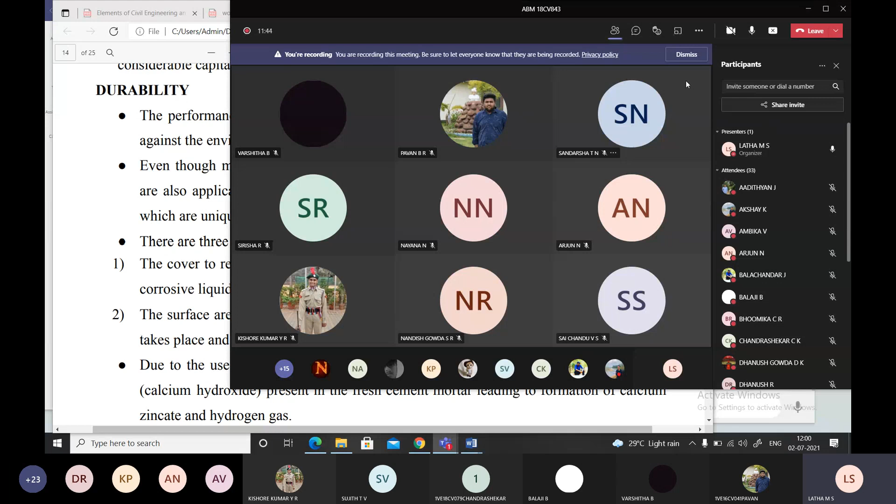That should not happen. You should apply your mind. How to answer a question is very, very important. Fine, I think you know what I'm talking about and you know what you have done. Correct?

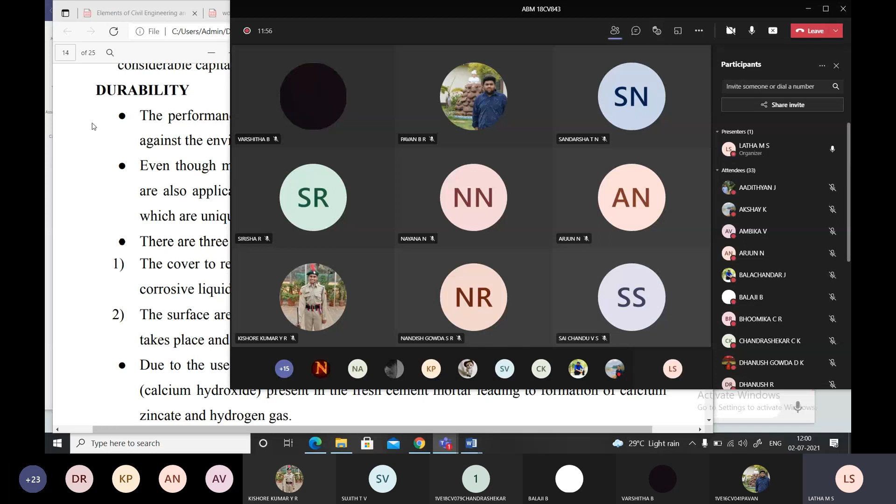Irrespective of the question asked, you just blindly wrote. The last question was asked: why do you prefer ferrocement instead of RCC for limited applications?

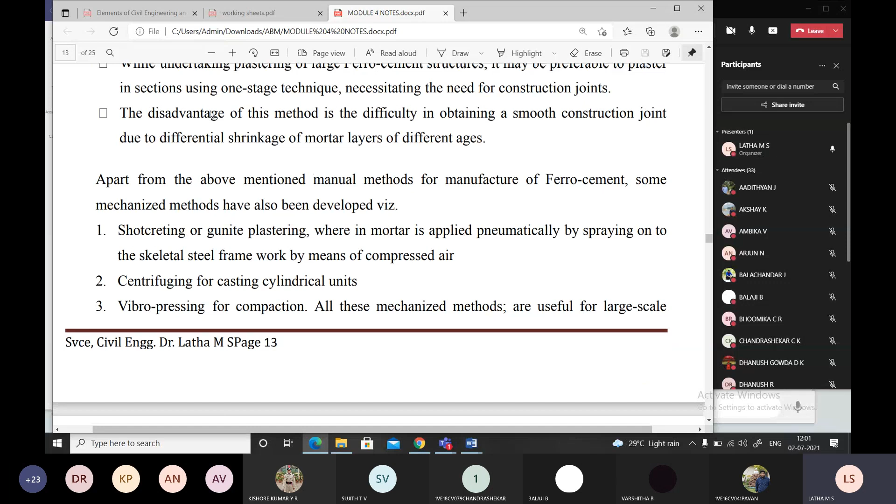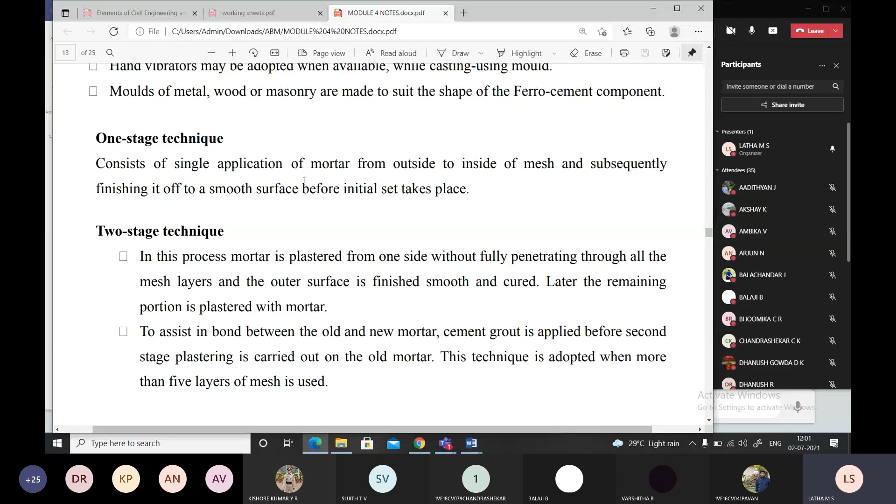Correct, a section unit. What is the complication? There's no complication in ferrocement. It can easily be approved or implemented with high technology just by improving the gauge. Correct, improving the gauge and all that, not like ordinary cement. Right, students? That should have been your answer.

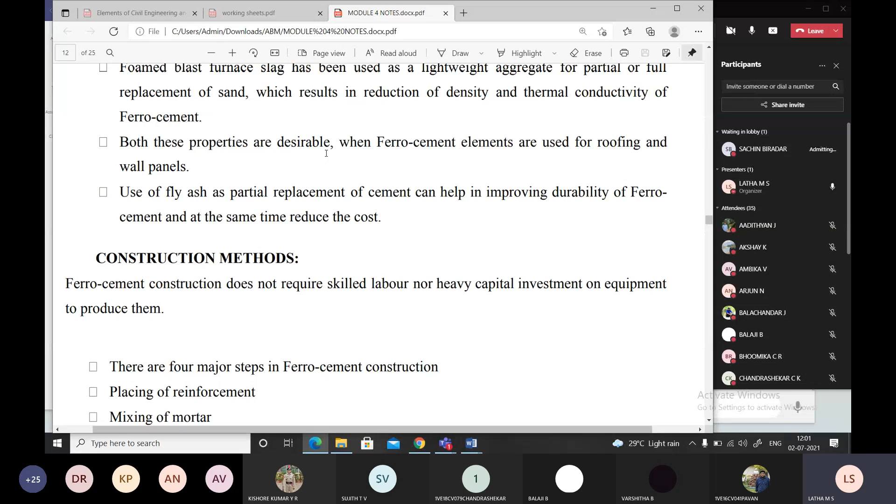Students, okay, but the answers you have given were not satisfactory. You have not read through the notes and you have not heard through my lecture. Most of you were not alert throughout the class while I was explaining and discussing the topic. You could have written a well-defined answer, and I was expecting very good answers from a few, because those questions

were at a higher degree, not a direct question. It was asked with respect to LEED and IGBC, correct? There were questions like LEED and IGBC, correct, my students? How do you answer such questions?

And some students, I'll tell you, uploaded the assignment as an answer script. Assignment as an answer script, students. How is it possible, students? Tell me. How is it possible to do so? Huh? They uploaded some assignment 2 or something like that for

the test answer script. Is that correct, what you are doing? That is very much wrong.

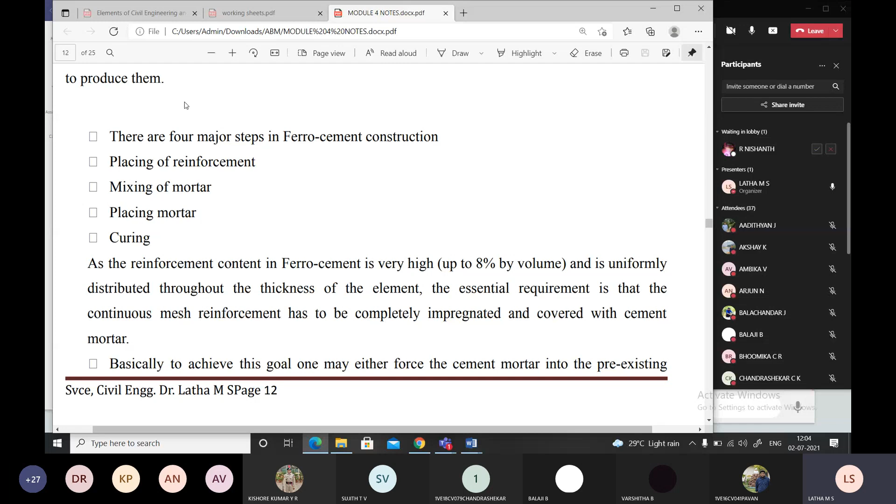Isn't it, students? Your answers were not unique and not descriptive. Correct? You never spoke in terms of IGBC and LEED, so there you may lose some marks. Okay? Never mind, make one more attempt. You have 3 internals to appear.

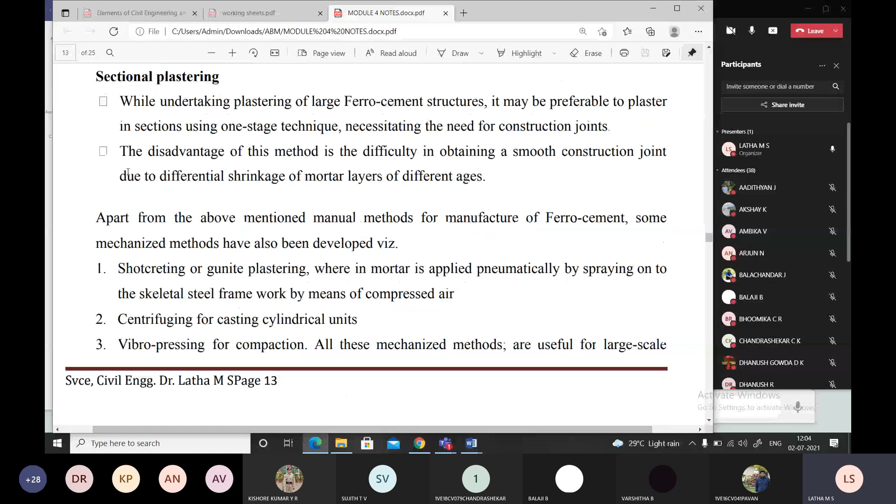Right? Next we'll continue with ferrocement as a durability aspect. We'll talk about ferrocement. What is durability, students? How do you define durability?

38 students are there in the class. How do you define durability? Life expectation of a material. Yes, it's an expectation, life or expectation of a material. Correct, or otherwise any other, that is also good.

Correct answer. Then the performance, the property of a material... the property of a material to withstand harsh climatic conditions and wear and tear. Yes, very good. See, one thing I would like to clarify, students: a ferrocement structure, it cannot be a material, right?

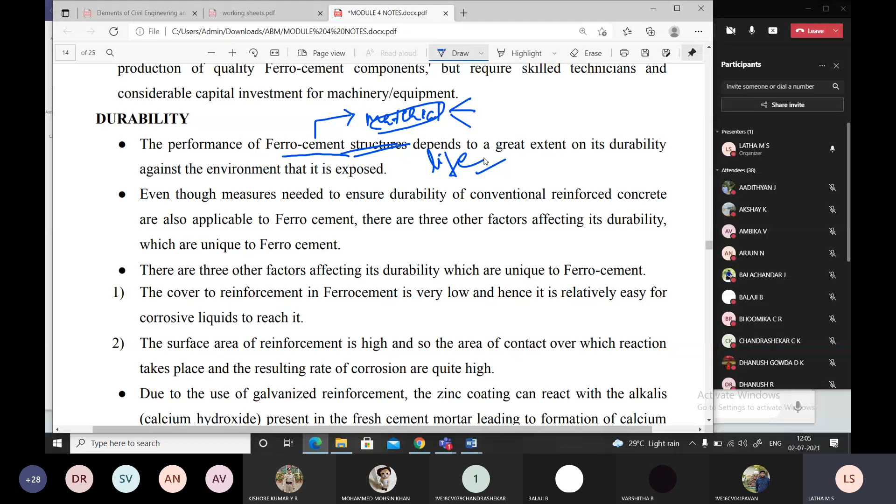So it is an element, correct? What are the materials composing ferrocement? They are cement, sand, and water, correct? So composing all the material, it forms into a structure, a ferrocement structure, or a ferrocement element. So this ferrocement structure depends to a great extent on its durability against the environment, right?

You agree it is exposed to environment. Why? Because your buildings and all are being exposed to environment. It can be hot, or it can be rainy season, or anything it can be. Even though, measures are needed to ensure durability. How do you check the durability of concrete, students, in your laboratory?

In a laboratory, how do you check the durability? In concrete, you have an acid test. You have to take a particular type of acid, purchase it, and immerse the concrete cube you have cast into a tray, and check for 24 hours, 48 hours, checking the weight of it. That is the durability check you perform.

Measures needed to ensure durability of conventional reinforced concrete are also applicable to ferrocement. So whatever concrete test you do for durability, it is also applicable for ferrocement. There are 3 other factors affecting its durability which are unique to ferrocement - unique meaning a single answer that doesn't map with any other.

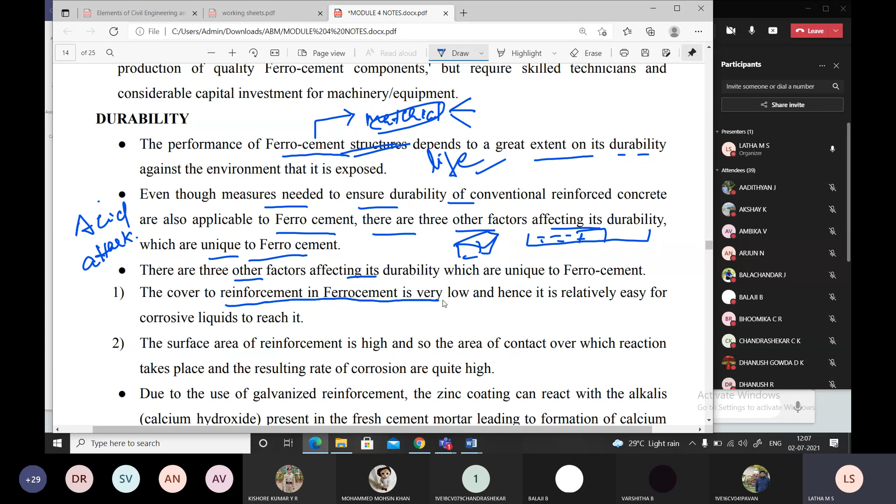What are they? The cover to reinforcement in ferrocement is very, very low. What is this telling us? It means you don't have the thickness of effective cover. Do you have effective cover thickness in ferrocement? Do you have any code books available for ferrocement?

Yes students, did you check if any code books are available with us? There are no code books till now. There are no such code books. If available, let me know also.

So the cover of reinforcement in ferrocement is very, very low. Like in RCC, you find 25 mm, even 55 mm, goes up to 65 mm for fire resistance, and hence it is relatively easy for corrosive liquids to reach - it is easily corroded.

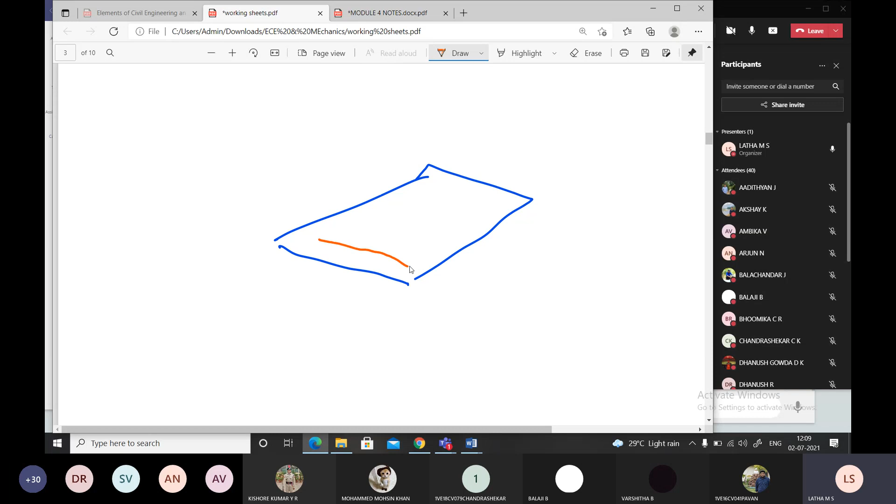The surface area of reinforcement is high, so the area of contact over which reaction takes place, resulting in corrosion, is very high. Why do I say this? Because, for example, this is a ferrocement panel, and I take one more color and identify one mesh - the ferrocement mesh. This mesh is spread over the entire length.

So what happens? At every point you find uniform thickness, and there is no effective cover like 25 mm being provided, because the total thickness of the ferrocement itself is only 25 mm, students. It cannot exceed this thickness. So we cannot get an effective cover of 25 mm, which is very, very important against corrosion.

So keeping this in mind, it has a great tendency to get corroded. Due to use of galvanized reinforcement, the zinc coating can react with the alkalis present in the fresh cement mortar, leading to the formation of calcium zincate and hydrogen gas.

So the possibility of chemical reaction taking place between the galvanized mesh, which is non-corrosive in nature - that zinc coating reacts with alkalis of the fresh cement concrete. Fresh cement is basic in nature; alkali is present, especially calcium hydroxide, which is one of the alkalis present and forms calcium zincate and hydrogen gas.

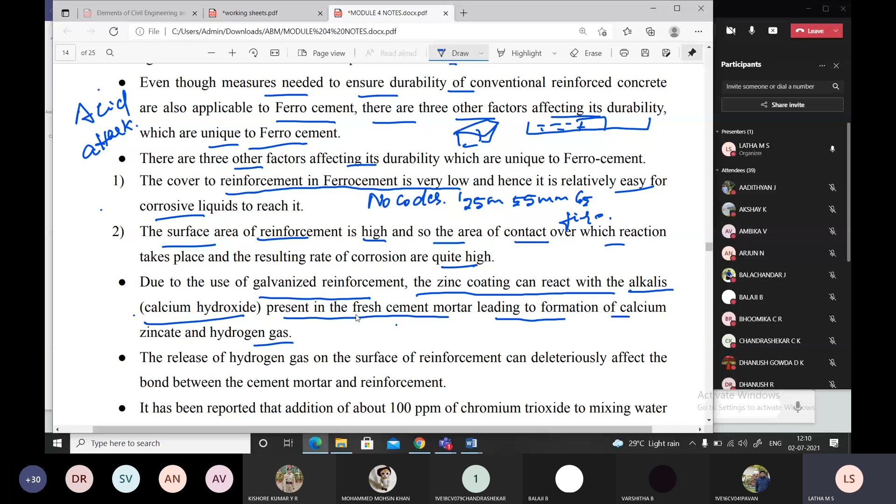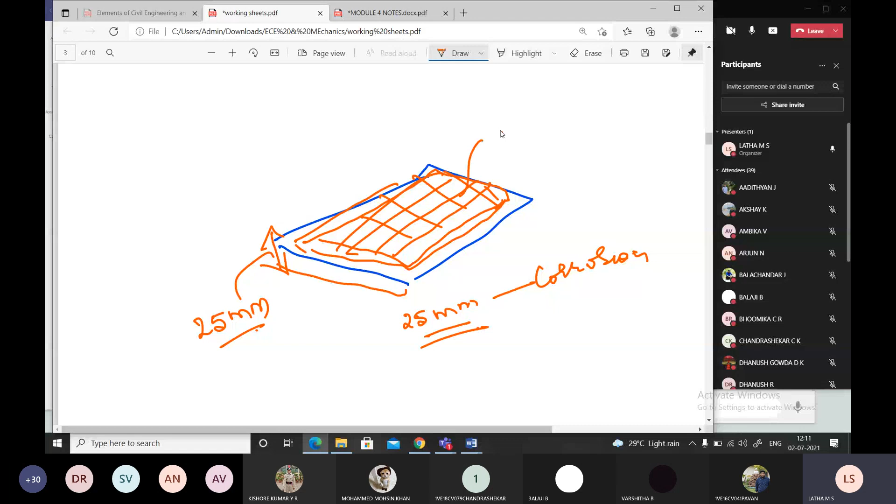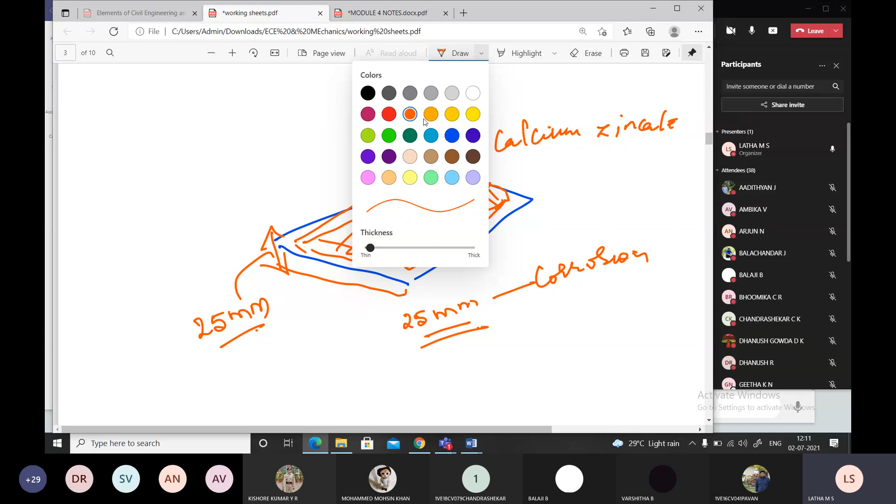The release of hydrogen gas occurs on the surface of reinforcement. So what happens on the surface - this is the formation of calcium zincate and hydrogen gas. The release of hydrogen gas may take place.

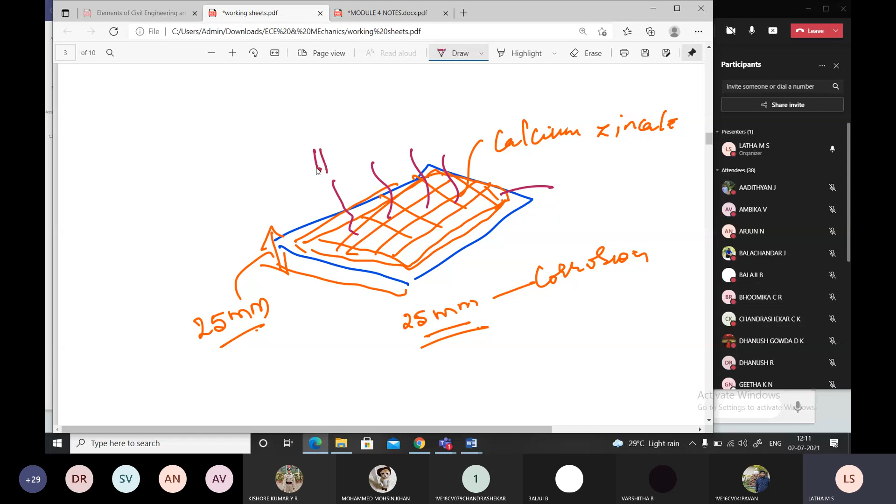The release of hydrogen gas takes place when there is a combination with what type of mesh I am using, students? It is a galvanized mesh. So when such a mesh is being used, this reaction takes place and there is a release of hydrogen gas on the surface of reinforcement, affecting the bond developed between the cement mortar and reinforcement.

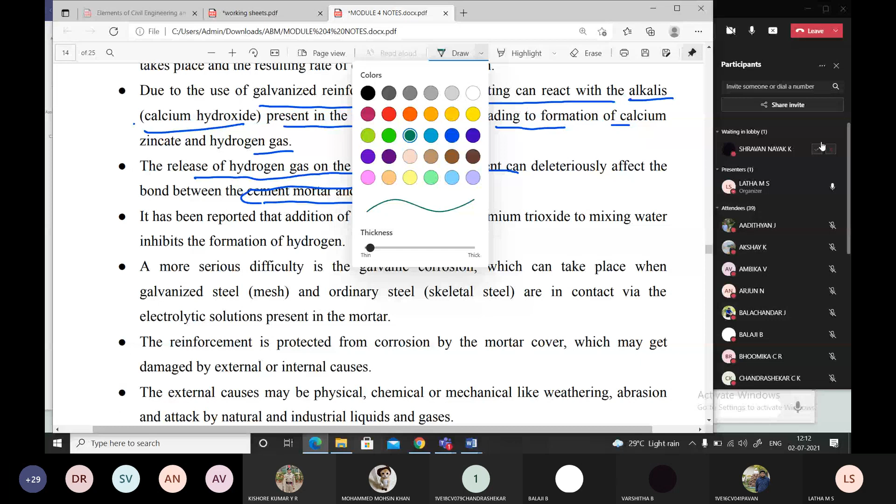What are they doing? They are debonding. It is a property of calcium zincate - it will try to develop debonding, it will not develop bonding. It will detach the bonding. So it affects the bond between the cement mortar and reinforcement.

It has been reported that addition of 100 ppm of chromium trioxide to the mixing water inhibits the formation of hydrogen. So how to overcome this hydrogen? In your project, students, if you are doing this, what chemical do you have to use in the water or the mix to inhibit the hydrogen gas? How to stop the hydrogen gas?

What should be used along with the water, students? 100 ppm of chromium trioxide, CrO3, has to be used while mixing the proportion along with the ferrocement and mesh. In the mortar of cement, sand and water, you have to include chromium trioxide.

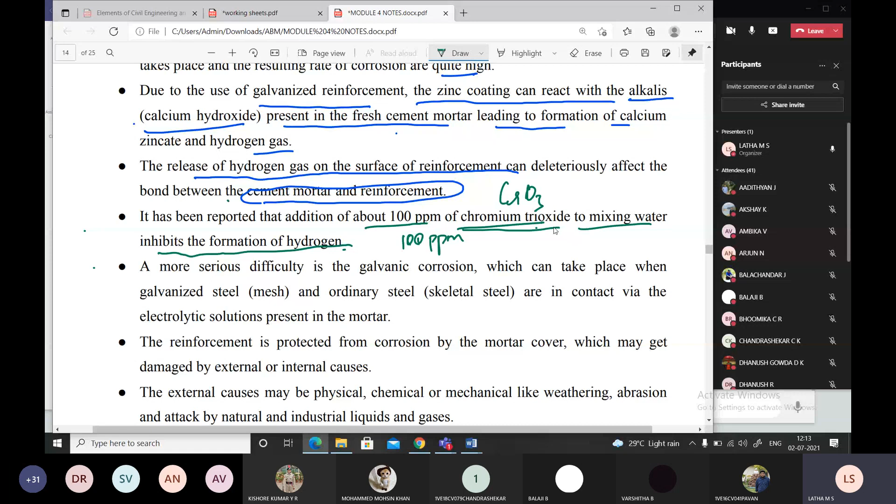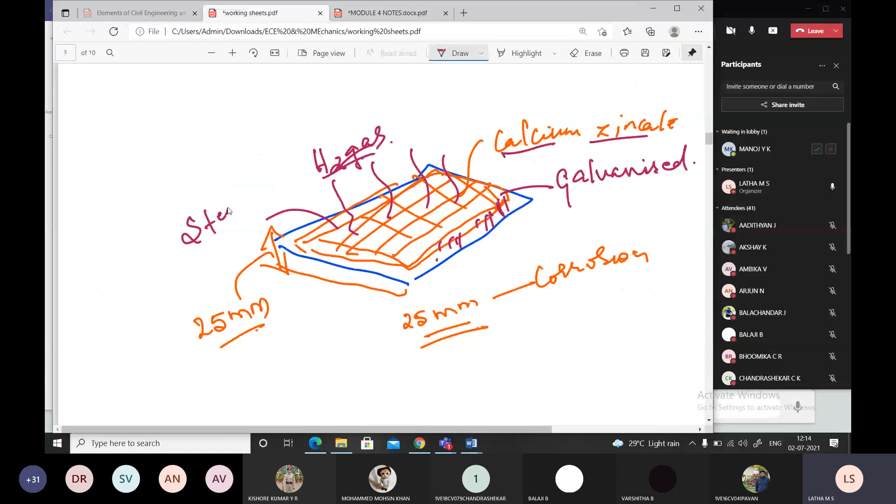A more serious difficulty is galvanic corrosion, which can take place when galvanized steel mesh and ordinary steel are in contact via the electrolytic solution present in the mortar. So what happens is the galvanized mesh and the ordinary steel skeleton - as you see, this is a steel skeleton, and on this you find the mesh.

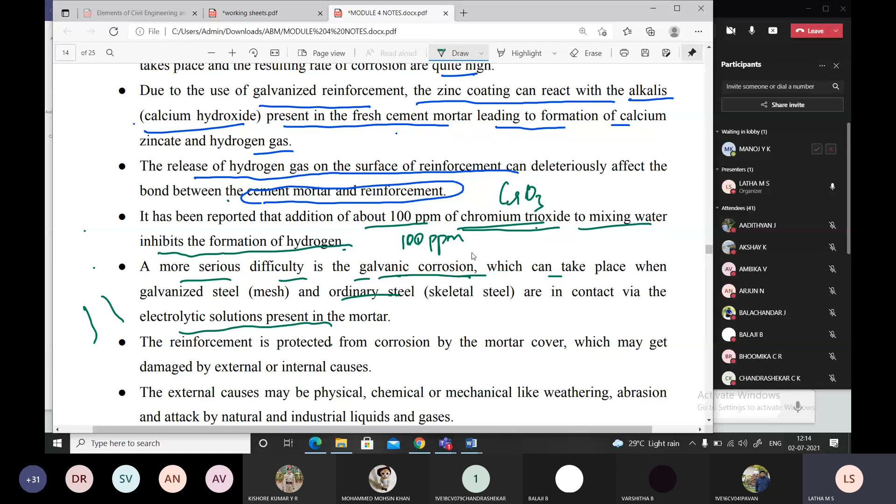Remember, on the mesh there's a reaction taking place. Electrolytic solutions are present in the mortar, and there's a galvanic corrosion which is taking place. So these are all the disadvantages, and we have to overcome them.

Disadvantages mean I should not stop using ferrocement concrete, but I should improve upon it using one or the other process to get rid of these problems. The reinforcement is protected from corrosion by the mortar cover, which may be damaged by external or internal causes.

This mortar thickness is hardly 25 mm, so the effective cover doesn't completely satisfy the concrete code. The concrete code tells that the minimum cover starts at only 20 mm, but for different elements it varies, so the condition is not satisfied.

The external causes may be physical, chemical or mechanical, like weathering, abrasion and attack. There are many such reasons causing the damages. These are the external causes for the damages. When there's an internal cause, there's an alkaline aggregate reaction taking place.

This is one important thing. An internal cause for the damage is alkaline aggregate reaction, and permeability of mortar takes place. Permeability means water can easily seep through, as small, negligible-sized pores are developed. Therefore permeability increases, due to the alkaline aggregate reaction taking place.

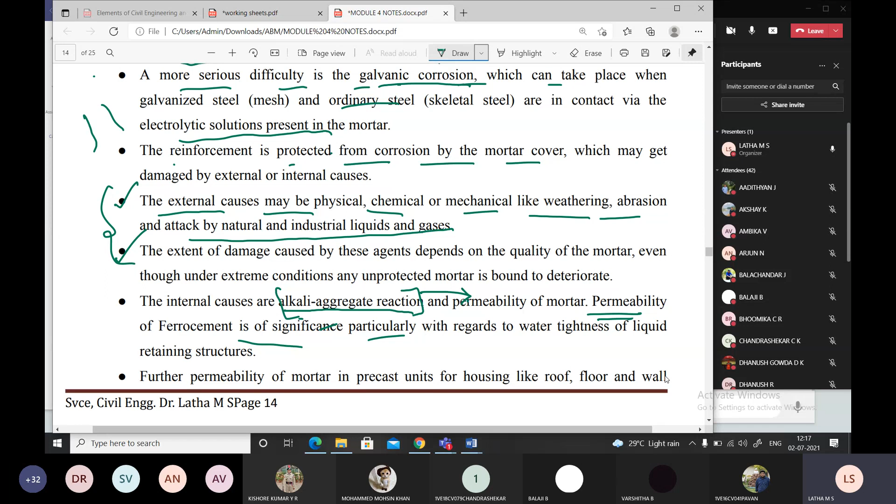Further, permeability of mortar in precast units for housing, like roof and wall elements - these are precast elements, not cast in situ. This can cause penetration of humidity, resulting in corrosion of reinforcement. When precast elements are cast using ferrocement as panels and used for construction, there's a possibility of penetration of humidity, only because of the alkaline aggregate reaction, which results in corrosion of reinforcement.

So how to overcome this - it should be checked against corrosion. The steel bars, the skeleton steel bars and the mesh used should have very good corrosion resistant action, and additives or admixtures should always be used along with the mortar to prevent corrosion. To protect the reinforcement from corrosion, coatings of vinyl or epoxy type may be provided.

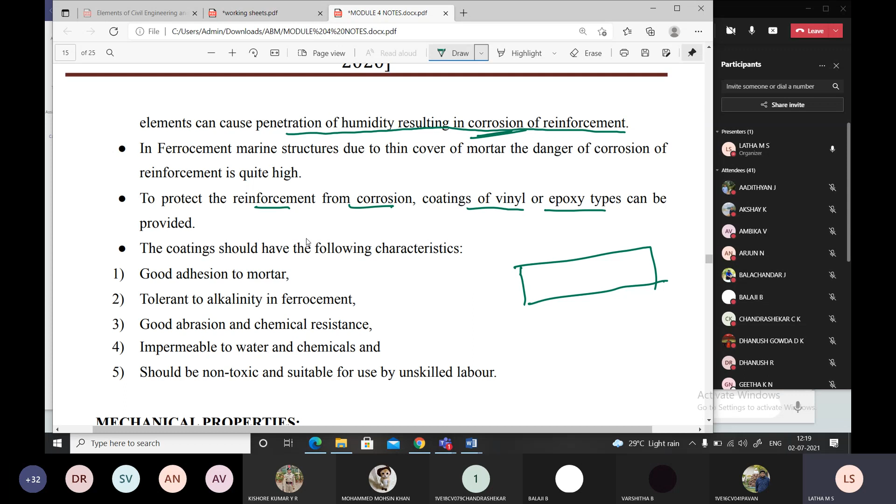This is one reason. Also, ferrocement marine structures are used. For marine structures, you can watch some channels about geography where different inputs will be given.

The coatings should have the following characteristics: good adhesion, tolerance to alkalinity in ferrocement, good abrasion resistance, and impermeability to water. They should also be non-toxic and suitable for use by unskilled laborers, because adding chemicals introduces toxicity which may harm the laborers, so one should be careful and use gloves. These are the possible ways to overcome corrosion.

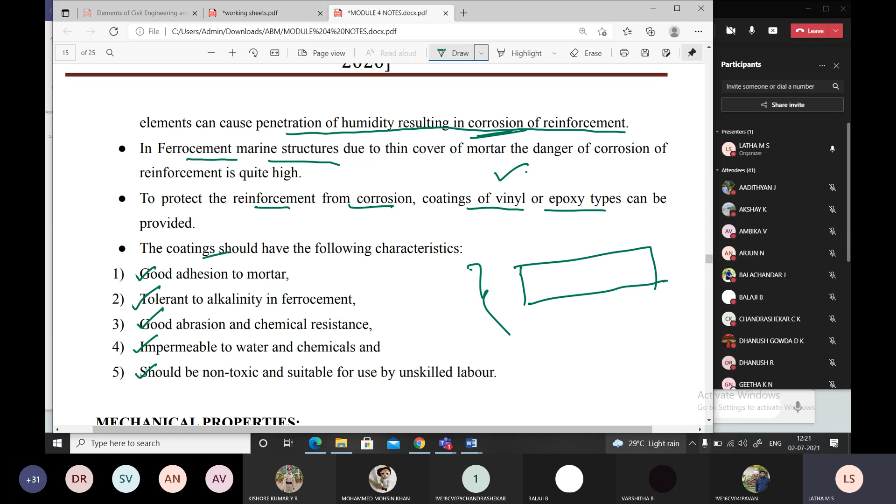On which topic I was talking? Which topic I was talking? I was talking about what? Which topic? Dhanush Gowda? Dhanushar? Yes, ma'am. Which topic I was discussing till now? Don't know? Don't know? Niroop? Niroop? Nishant? Ma'am. Tell me on which topic I was talking about, discussing, giving a lecture. Pooja? Pooja?

Ma'am, on which topic we were discussing till now? Ferrocement, ma'am. Yeah, in ferrocement, what topic? On what the discussion was made? Durability, ma'am. Yes, very good. Durability we were talking about. Niroop, Dhanush, huh? Where you all at?

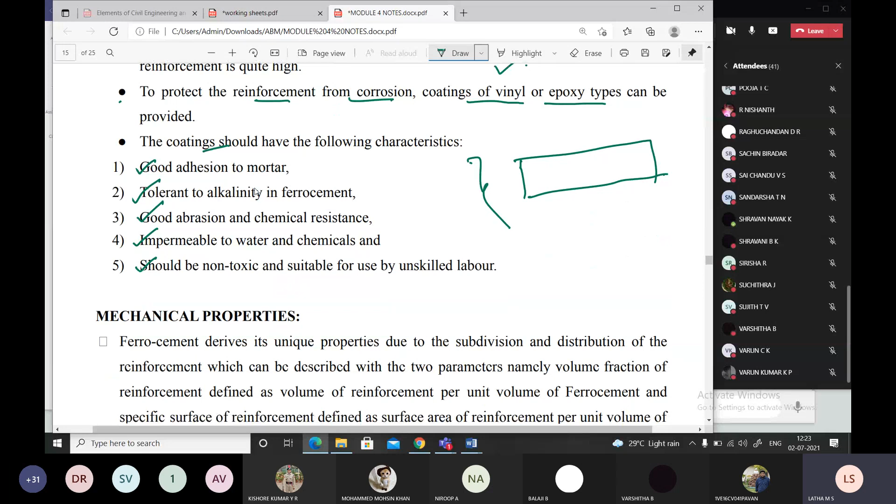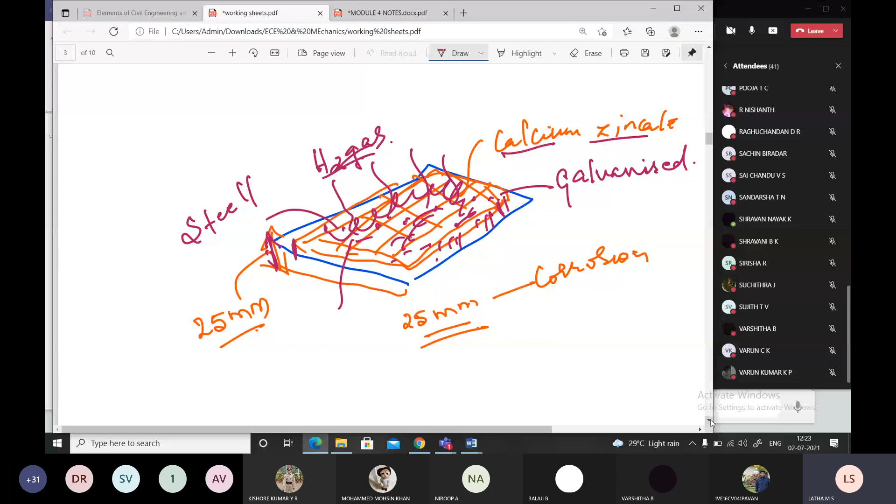Now, moving forward, we have to talk about the mechanical properties of the ferrocement. See, mechanical properties means keep in mind you have a concrete, it will be subjected to 3 or 4 mechanical properties. You have a concrete cube. When I ask you to test for concrete, what you'll be doing? You'll be casting a concrete, correct? And you'll test for compression, correct students? That is one test you'll be performing, correct? Yes or no?

Now I want to test the concrete for flexure. What test I'll be doing and how the specimen casting will be for flexure? How the test will be performed. For compressive strength, I can just take this compressive cube, right? 150 by 150 by 150 mm and apply single load. I'll be using your CTM machine, compression testing machine. Okay. What about flexure? How do I perform the test on concrete? The same concrete, let me take it as M30, I have designed and cast this cube. Now how to do with this flexure?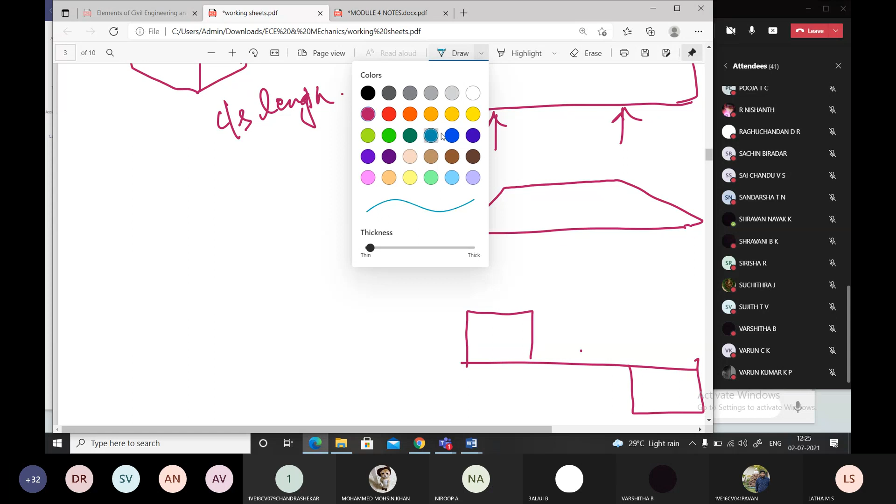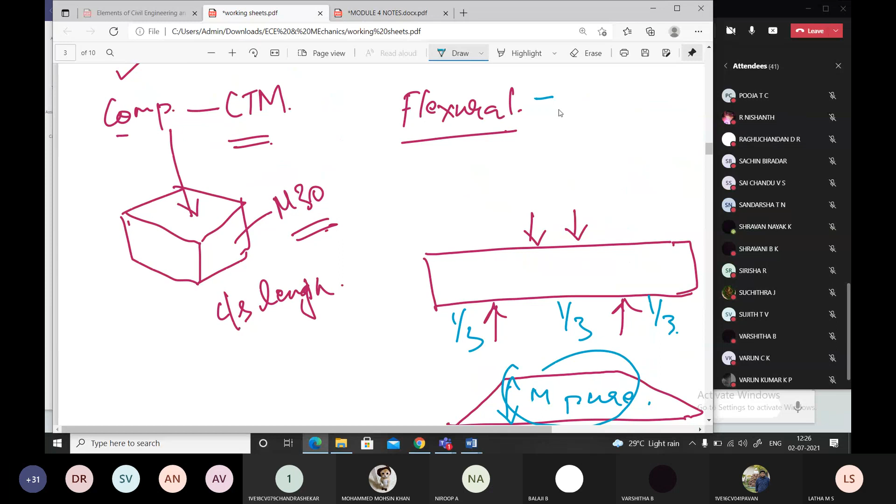I get the shear force diagram and bending moment diagram here. So this portion will have zero shear, and maximum shear in this portion of 1/3, if I divide the beam into 1/3, 1/3 and 1/3 portions. So here you find pure maximum bending moment. Where the maximum bending moment is existing, there you find shear force zero. Do you get the difference? So I'll be casting a beam and applying the 4-point bending test. Which setup I'll be using? I'll be using a loading frame.

So similarly, students, you have to test the ferrocement, correct? To test the ferrocement, you have to demonstrate some physical test. So let us know what is that physical test you'll be doing. At first, the ferrocement derives its unique properties and strength from the subdivision and distribution of the reinforcement. And there are two parameters: volume fraction of reinforcement, defined as volume of reinforcement per volume of ferrocement.

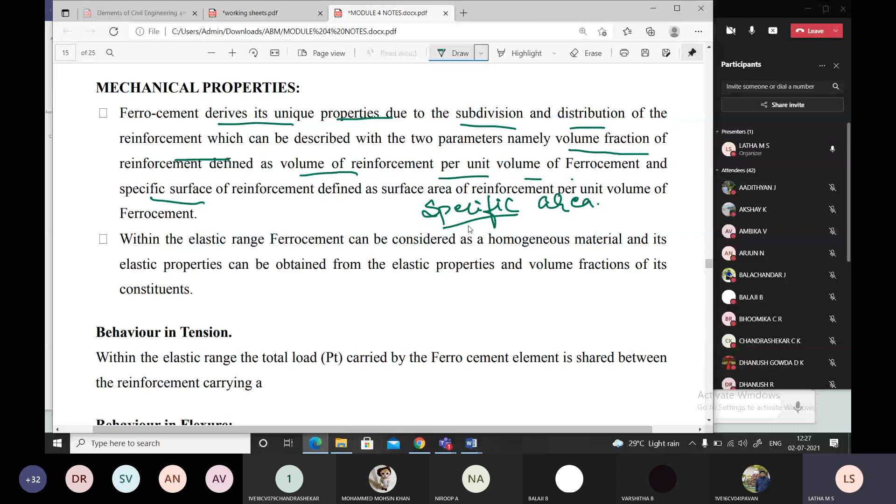That means you will be calculating what is the volume of ferrocement required, and the surface area is very, very important. Specific surface area you have heard, students? Yes or no? In concrete technology, you come across this word, students. If you don't know the specific surface area, you don't know concrete technology. Specific surface of reinforcement. Yes or no? Or I'll ask you some question related to that. If you are interested, I'll ask a question. If not, I'll proceed.

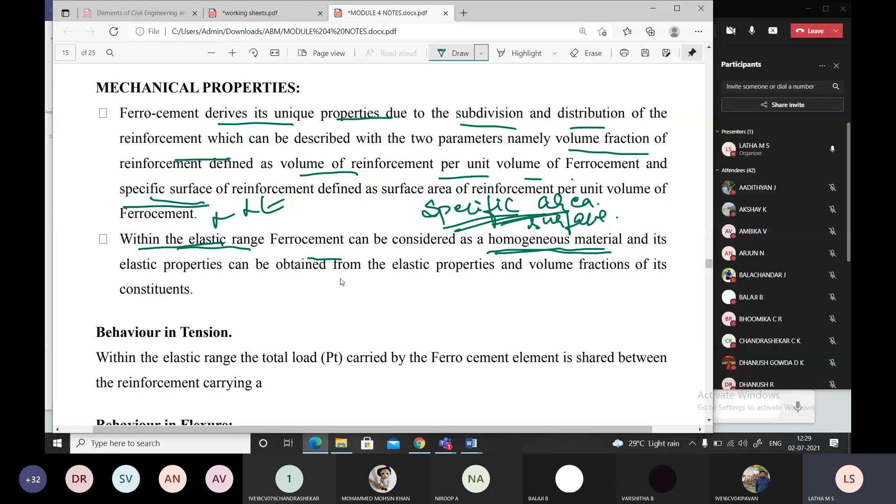Okay. Now, within the elastic range, ferrocement can be considered as a homogeneous material. What do you understand by within the elastic range, students? At least you can tell this now. You know the answer. Stress is proportional to strain. Right. So within that limit, we say that there's a homogeneous material distribution. It obeys the elastic properties. So keeping that in mind, as with concrete, we perform the test. What are all the tests we perform? We perform especially a tension test or flexure.

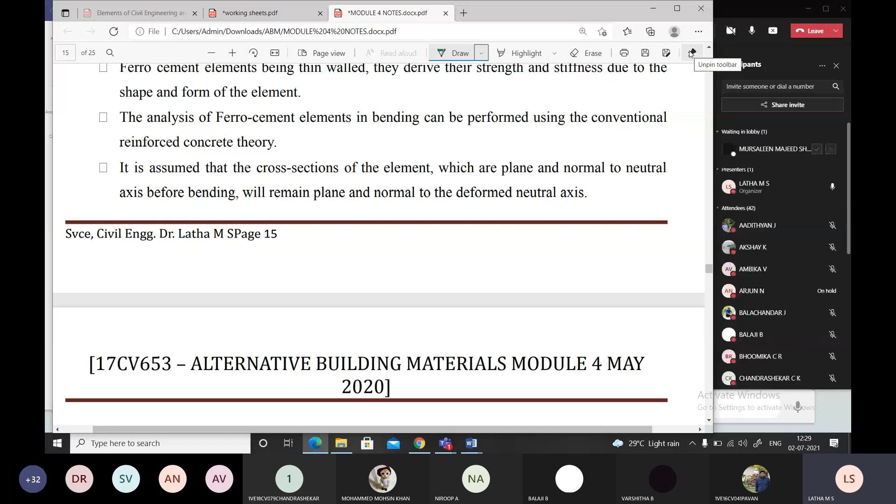People arrive at this time.

Flexure. Now, how do you understand the flexure? It's the same thing. Tension, I put that as a tension, don't worry, it is flexure. This is a flexure. Right? Now, that is for concrete. Now we'll understand for ferrocement.

Ferrocement elements being thin walled, they derive their strength and stiffness due to the shape and form of the element. The analysis of ferrocement element in bending can be performed using the conventional reinforced concrete theory. What is the conventional reinforced concrete theory, students?

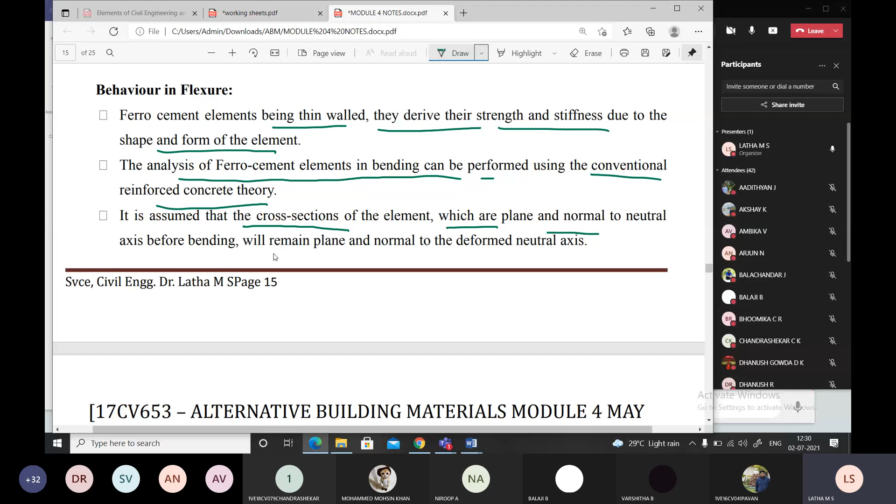Plane remains plane, normal to the neutral axis. Remember, cross sections of the element which are plane and normal to the neutral axis remain plane before and after bending. Yes or no? The same principle it follows, that of your concrete.

If the skeletal steel is provided very close or at the centroid of the cross section, it will have no contribution in the bending. Correct now? Because a neutral axis doesn't bend. So only it is called as neutral axis. You find this is neutral axis.

If the mesh is very close to the neutral axis, it will neither compress nor undergo any tension. Correct, students? That is the reason. So it will have no contribution in bending and hence can be neglected within the elastic range.

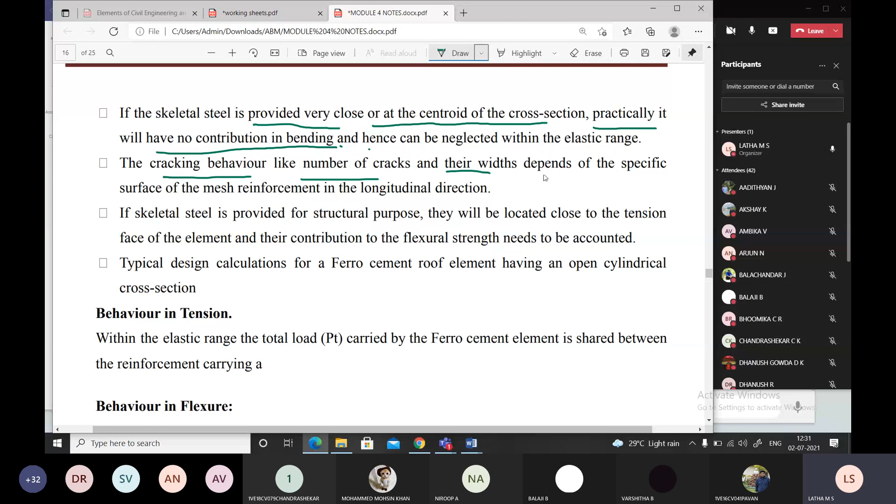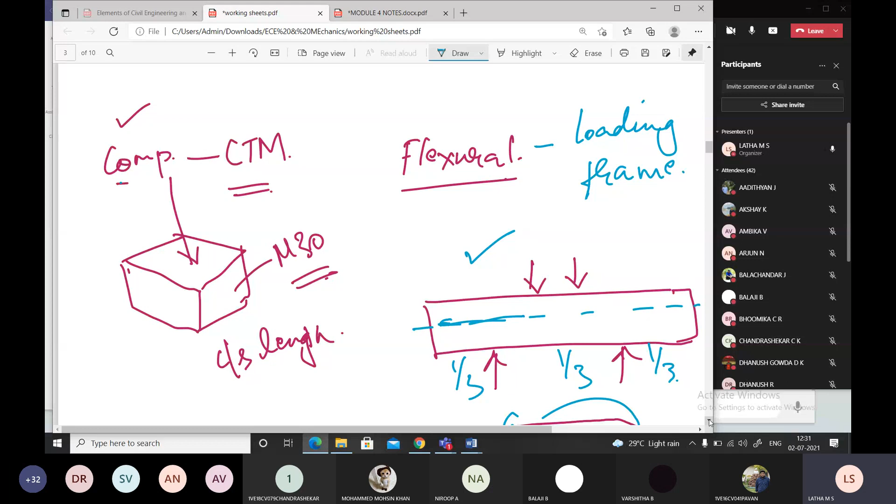The cracking behavior, like number of cracks and their width, depends upon the specific surface of the mesh reinforcement in the longitudinal direction. Specific surface. Now tell me, students, I'll ask you one simple question on specific surface, maybe you should be able to answer. Now I take a box here like this. I fill this up with 2 mm dia balls.

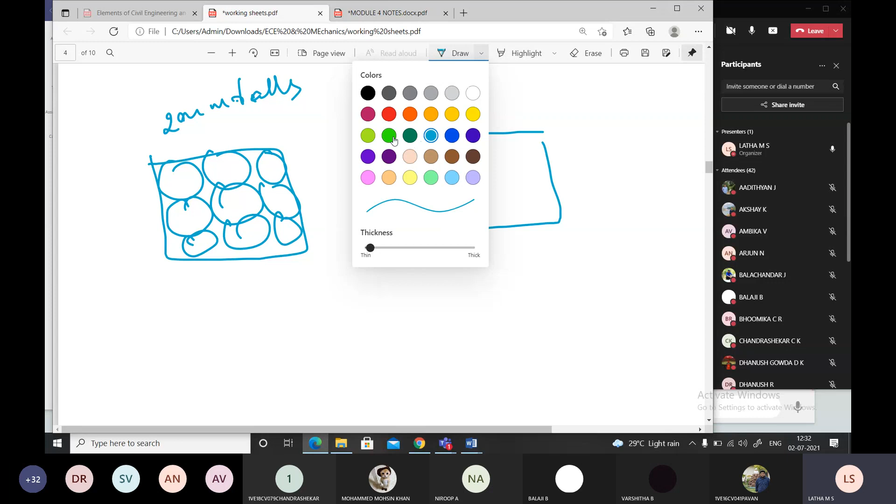Okay. Now I'll take the same container. You're listening, students? Yes, ma'am. I'm filling it with smaller diameter balls, maybe 0.2 mm balls. Which one will have greater specific surface value? Let me call this as A and this as B. Whether A will have greater surface area or B will have greater surface area?

You have studied in concrete technology with respect to cement. Think that I have filled this tray with cement having 0.2 mm size grains. Which one will have a greater value of specific surface area? Definitely the finer particles have greater specific surface, whereas this is having a low value. So B is greater than A.

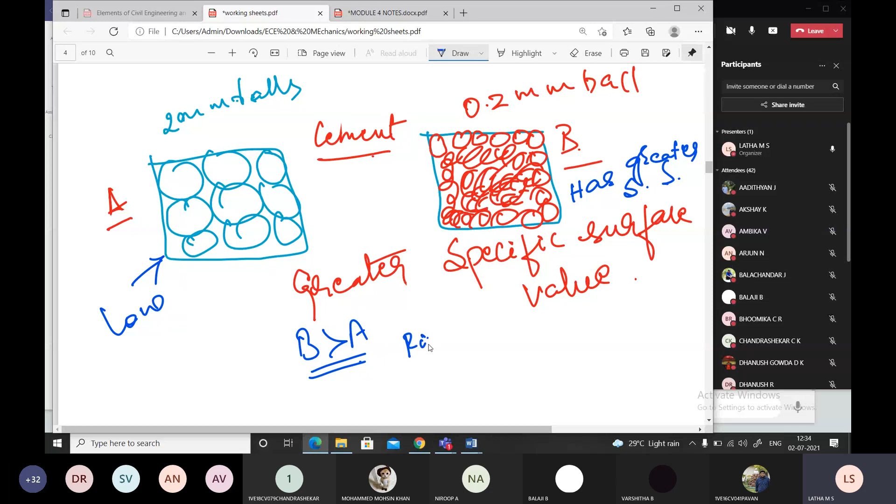What do you infer with this, students? I'm telling B has greater surface area. What do you say with that? Finer the particle size, greater the what? Specific surface. How?

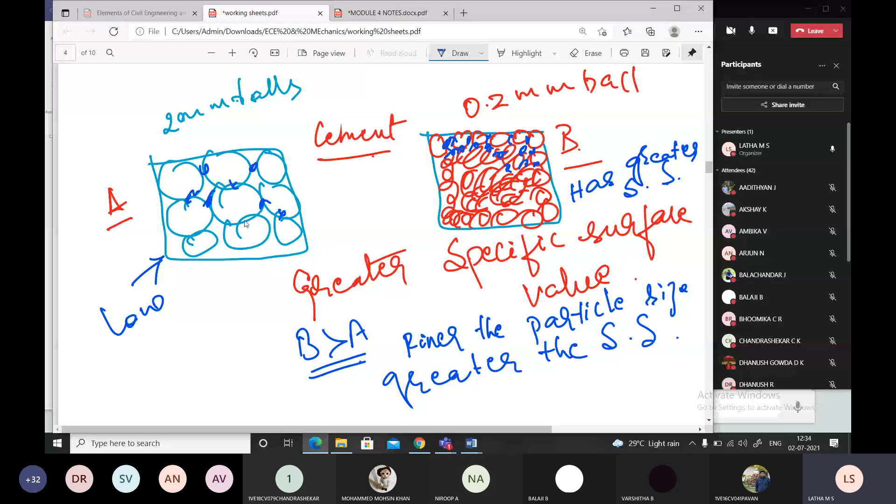Because the points of surface coming into contact are more between the finer particles. Correct now, students? Whereas here you find hardly few particles coming into contact. That is how we define the specific surface. So similarly here, you can see where we were at.

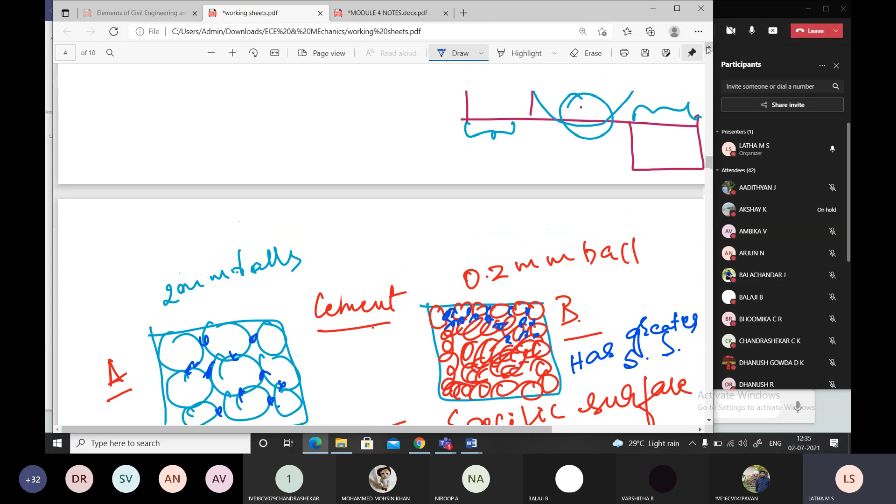If the skeletal steel is provided for structural purposes, it will be located close to the tension face of the element and its contribution to the flexure needs to be accounted. Because when you are testing a beam or any element like that, you have to provide the mesh in the tension zone, not in the compression zone. For example, if you are casting a small miniature of a beam, you have to provide that in a tension zone.

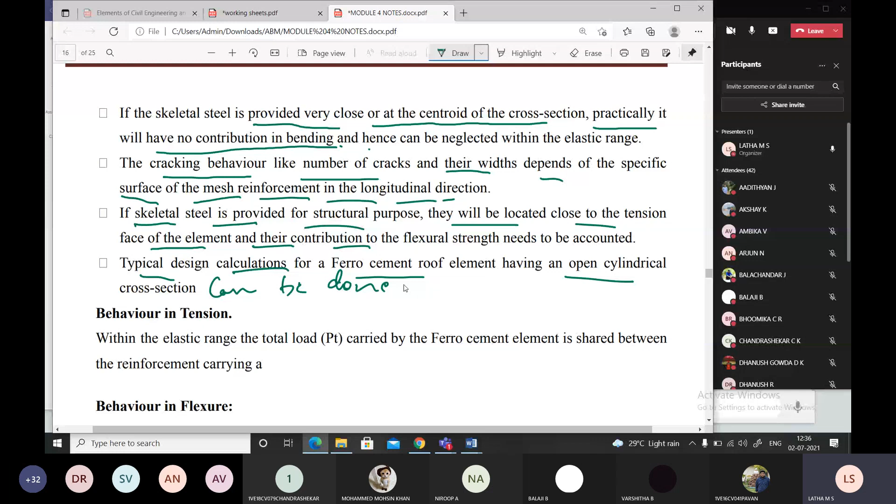Typical design calculations for a ferrocement element having an open cylindrical cross section can be done. It's more or less like your concrete design what you are carrying out. The same you can think of with ferrocement. I think this page has been repeated. Yes, page is repeated. Now going to the application.

Did you understand? You have only one mechanical behavior of the ferrocement, the flexure. In flexure, what is happening? We have to place the skeletal bar and the mesh together in the tension zone when it is being tested for flexure, because more of the tension will be below the neutral axis. And if the mesh is at the neutral axis, students, it will contribute neither to the tension nor the compression. That has to be very clear.

And regarding specific surface, it all depends upon the material size which comes in contact with the mesh. Even the specific surface area will contribute towards the flexural strength. Now coming to the next applications.

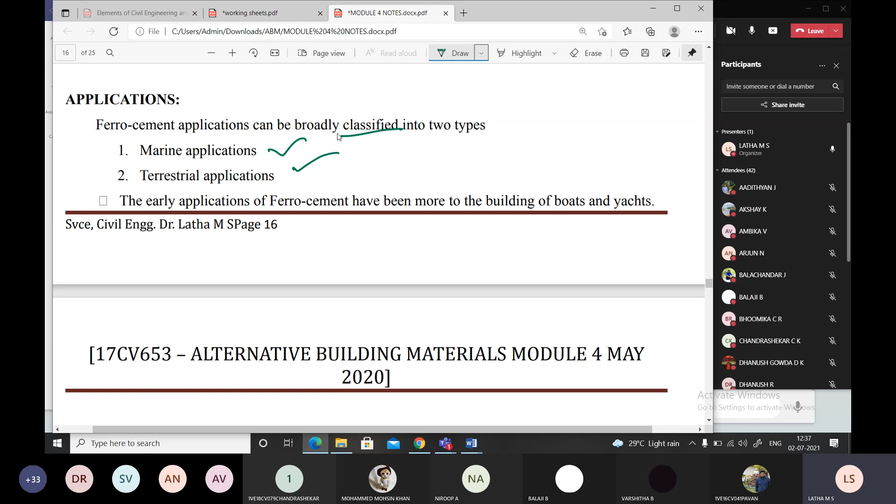What are the major applications you find? Marine applications and terrestrial applications. What are the applications? Let us understand. Overall, whatever applications you find, marine or terrestrial, they are put in two forms.

In recent years ferrocement has received attention as a material for terrestrial uses in housing, agriculture, water and grain storage, irrigation. Many such applications can be widely observed. Students, you find this in the Karnataka Housing Board. Have you heard about Karnataka Housing Board?

When they started, in 1990, they started with the construction of housing facility, but they wanted immediate construction. So they started planning the use of ferrocement. It could work out as a precast element and as a ferrocement element, because in ferrocement, students, only the reinforcement differs.

In ferrocement, I'm using only the skeletal bars and the mesh. But in precast elements, I'm not using any skeletal mesh. I'm using ordinary conventional reinforcement. There only it differs, right?

In housing construction by KHB, they provided all the small steps, small chajjas or projections at the windows or doors, and the shelves inside the house, or shops or storages. You find ferrocement effectively used, because of quick production of these structures.

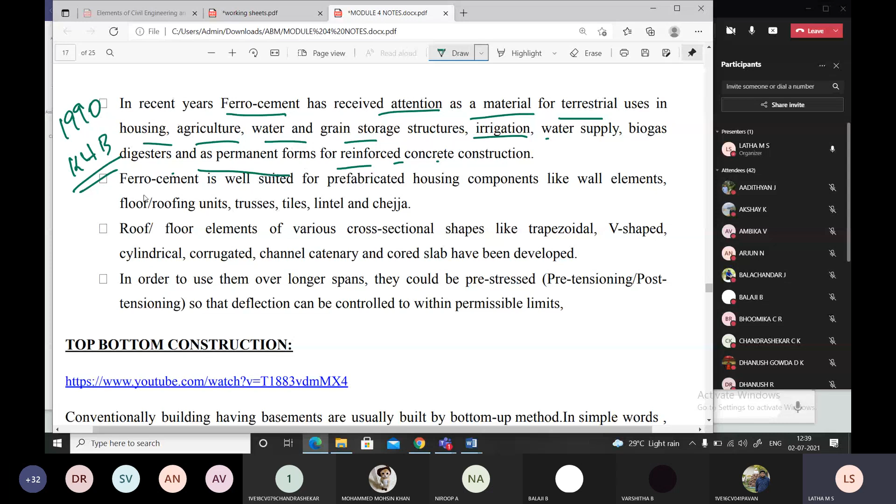Ferrocement is well suited for prefabricated housing components like walls, because these are industry made, students. It can be done very quickly. Roofs too, because they are developed as individual elements and later compiled together.

Roof and floor elements of various cross-sections like trapezoidal, V-shaped, channel, corrugated channel can be easily developed. For example, in your semester project you did an extensive survey. The channel has to run from the reservoir to the farmer's field. So what type of channel will you provide, students?

A ferrocement channel can be formed more effectively. Ferrocement channels can be used throughout, and different shapes are available. To use them over longer spans, they could be prestressed by pre-tensioning or post-tensioning, so that deflection can be controlled within permissible limits.

Next year you'll be studying prestressed elements. In prestressed elements, students, while casting we do pre-tensioning or post-tensioning of the reinforcement using tendons, but in ferrocement we use a mesh which is not of such high strength that pre-tensioning and post-tensioning can be done.